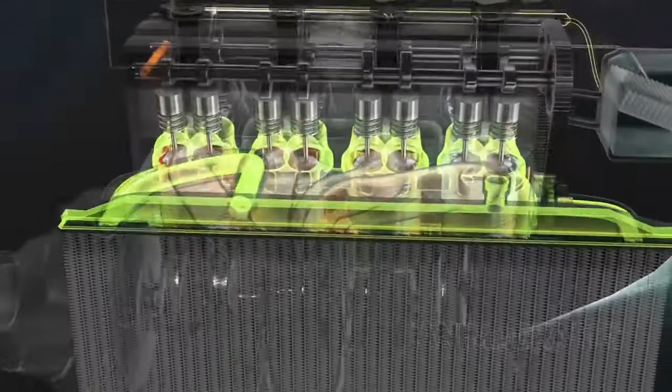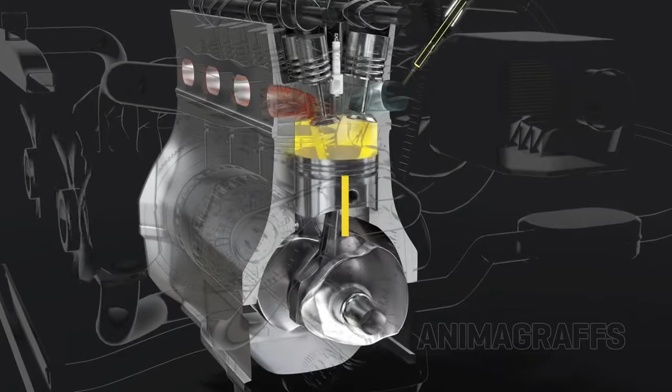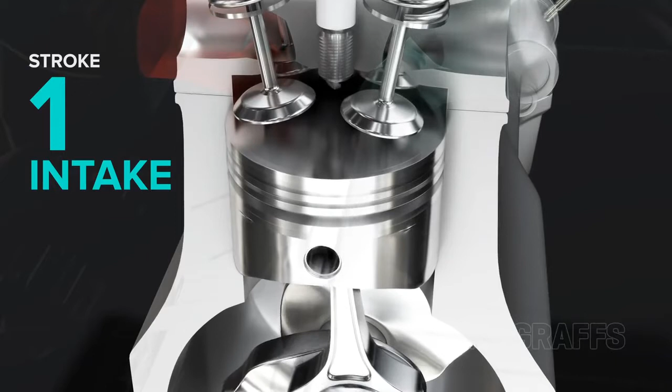The four-stroke cycle. When a piston travels to the end of its range, whether up or down, that's a stroke. Car engines use a four-stroke cycle, and it goes like this. First, intake. The piston descends, sucking an air-fuel mixture into the cylinder through the intake port, with both intake valves

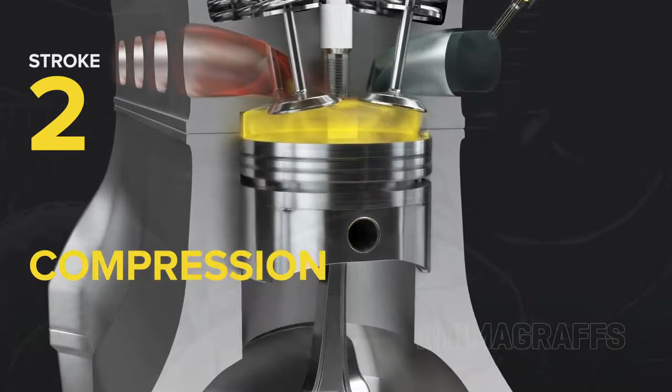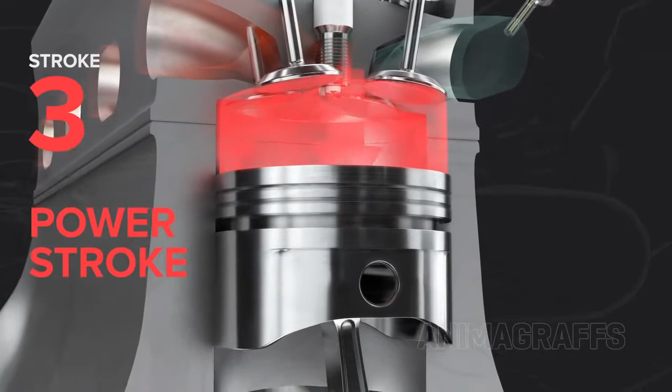open. Next, compression. With all valves closed, the piston comes back up, compressing the fuel and air mixture for more powerful combustion. Then, the power stroke. An electrical spark ignites the compressed fuel and air mixture, and the resulting combustion forces the piston to the bottom of the cylinder again. A connecting rod transfers this power to the crankshaft.

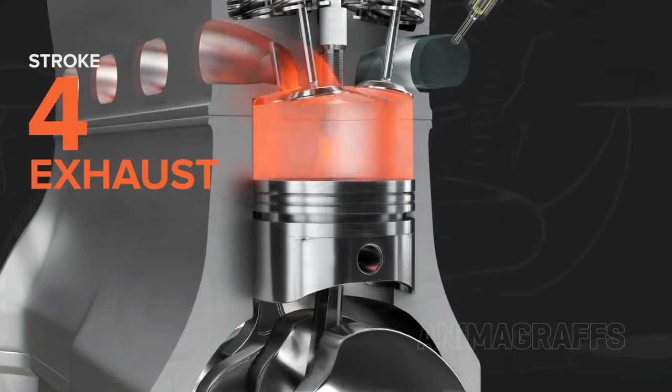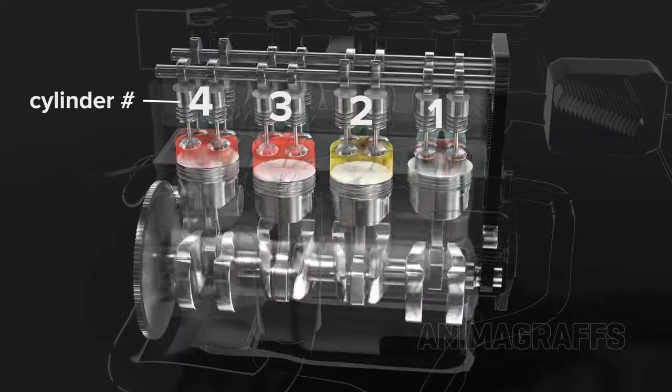Finally, exhaust. The piston comes back up, pushing the spent mixture out through open exhaust valves and the exhaust port. Connecting multiple pistons: for smooth power delivery, pistons take turns firing. The firing order for this engine is 1, 3, 4, 2.

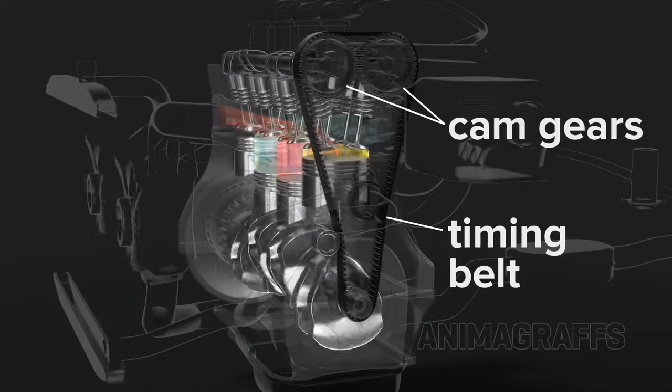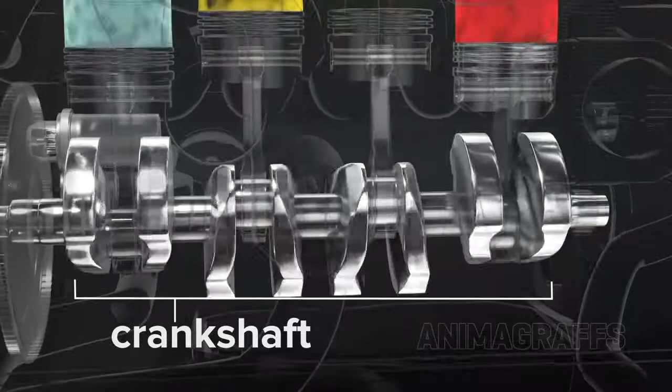Camshafts with specially shaped cams push spring-loaded valves open in turn. Cam gears and a timing belt or chain link everything to the crankshaft, and it all spins together. The crankshaft translates piston power out of the engine. It has counterweights to balance against the pistons for perfectly smooth revolutions.

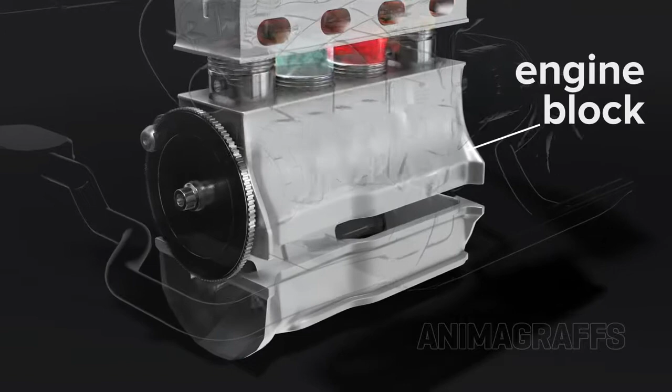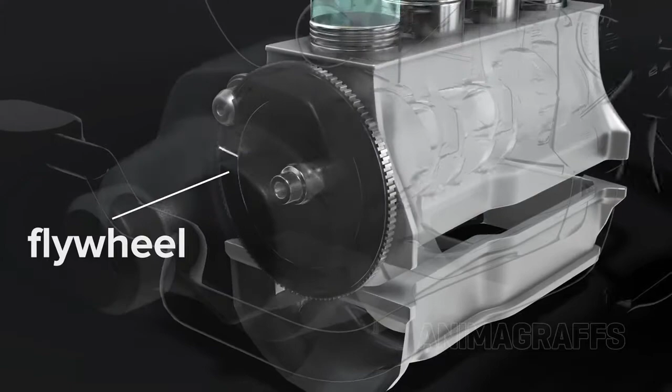This is what RPM means. We're counting the number of full crankshaft revolutions per minute. The engine block holds the crankshaft and cylinders, and the cylinder head holds valves, ports, cams, etc. A geared flywheel sits at one side of the crankshaft for connection to a transmission. It's also where the starter connects to the system.

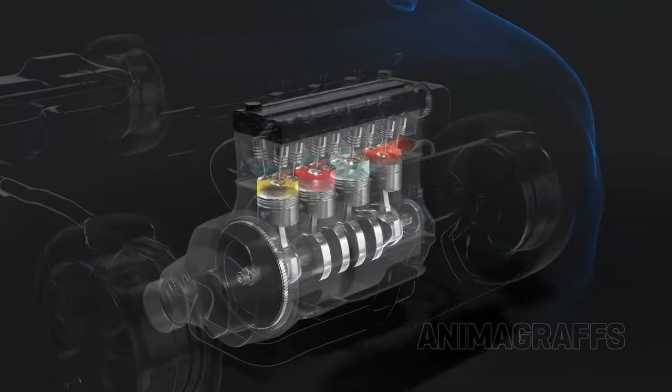This engine has 4 cylinders arranged in a single row, but there are many other possible configurations, like 6 cylinders with 3 on each side, angled in a V shape, or 8. Despite different design goals, the basic engine parts are all there. Now let's look at other systems that support this combustion process.

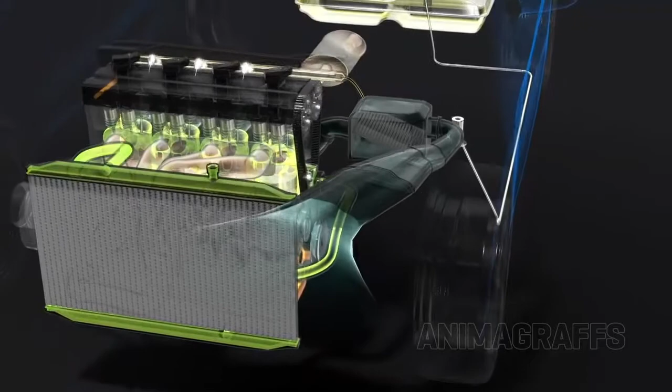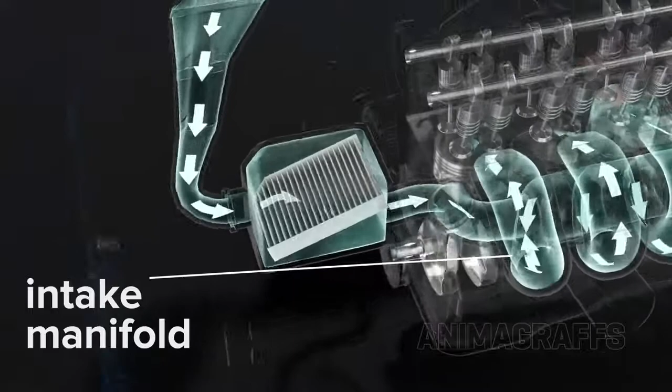Air intake. Air comes in through the air filter and then into the intake manifold, where it mixes with fuel before being sucked into individual cylinders through intake ports.

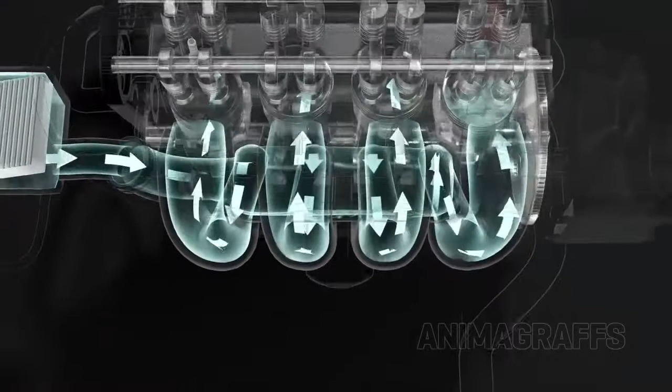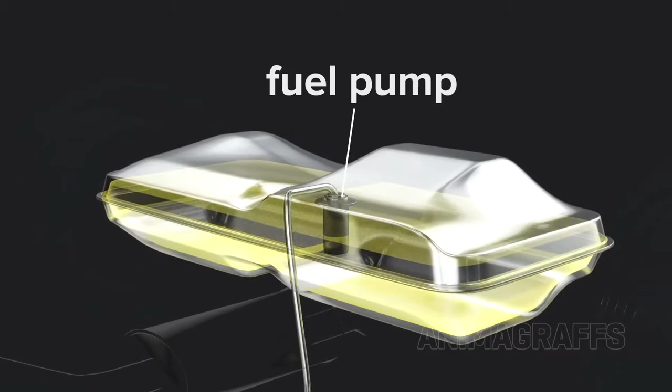Fuel. The fuel pump carries gas from the tank through a fuel filter to the engine, where fuel injectors emit a precisely timed spray of gas into the intake port.

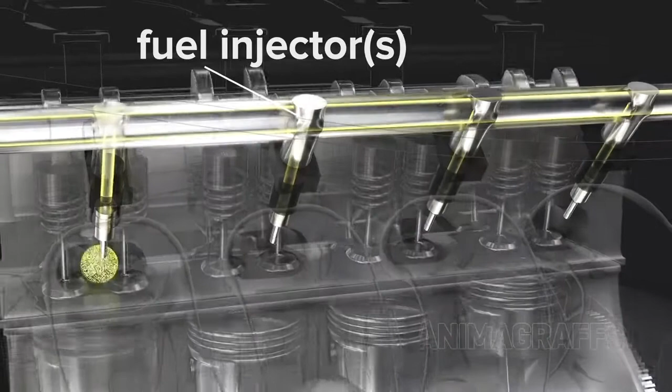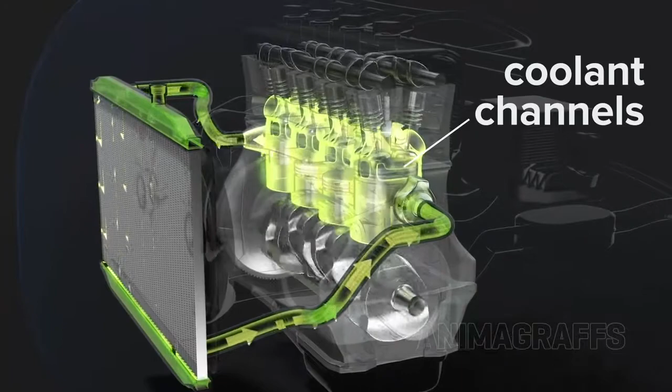Cooling. Engines get very hot during operation and require a cooling system. Coolant channels around the cylinders and through the cylinder heads carry a special liquid called antifreeze to keep temperatures within safe operating range. It's called antifreeze because it won't freeze in icy weather.

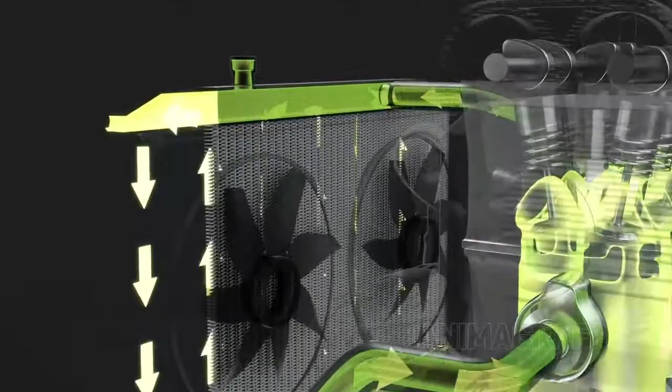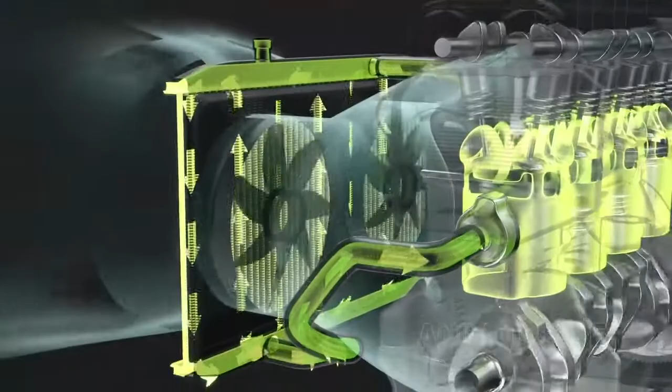After cooling hot engine parts, coolant circulates through the radiator. The radiator has a network of small tubes and fins. Coolant passes through these channels while air, pulled in by the radiator fan, blows by the tubes, cooling the hot liquid for recirculation.

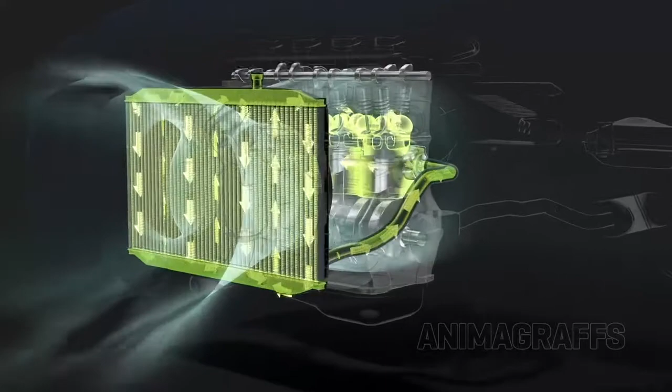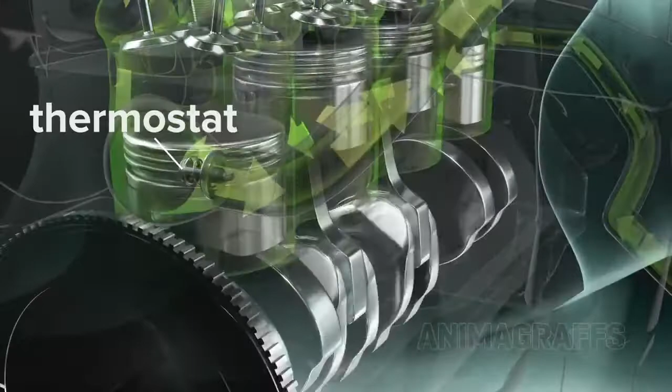A water pump keeps the coolant system flowing and properly pressurized. The thermostat regulates coolant temperature by either routing coolant back through the engine or to the radiator for further cooling.

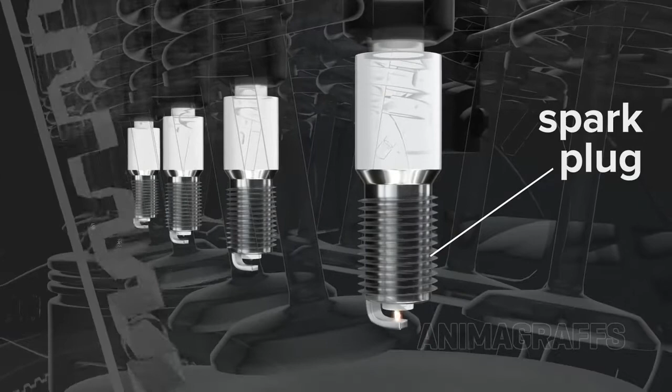Electrical. The spark plug delivers the electrical spark that ignites the fuel-air mixture for combustion. The metal core is insulated from the outer metal casing with porcelain. The spark jumps between these conductive surfaces.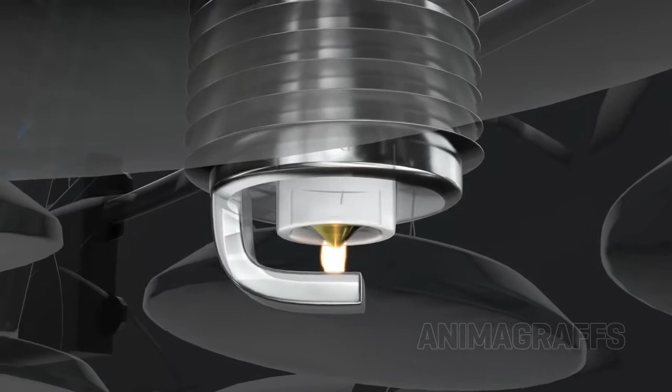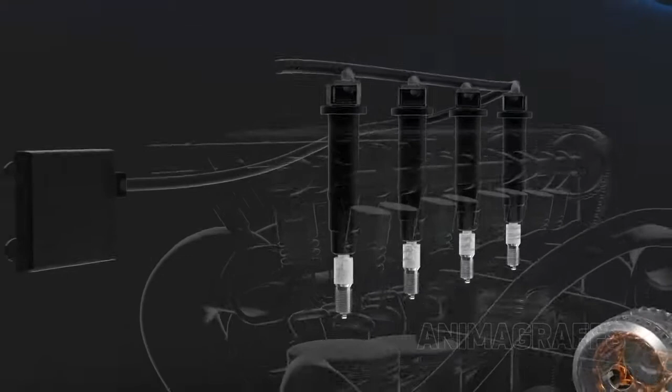The coil pack delivers electrical current to the spark plugs as directed by the ECM, or Engine Control Module. The ECM is a computer that directs many core engine functions like spark timing, valve open and close timing, air-to-fuel ratio, etc.

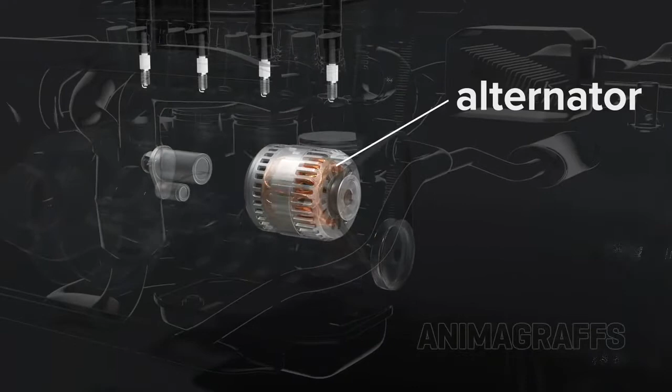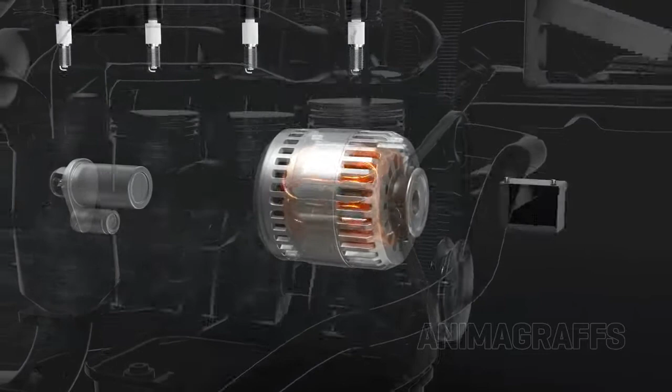The alternator works like a power generator, converting the engine's mechanical energy into electricity to charge the battery or run other electrical systems while the engine is running. The battery provides power to the starter for engine start.

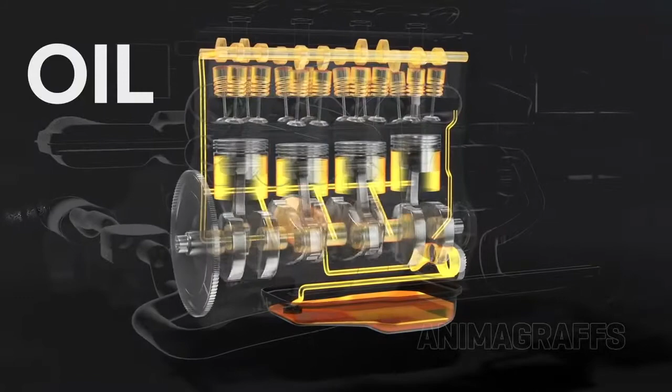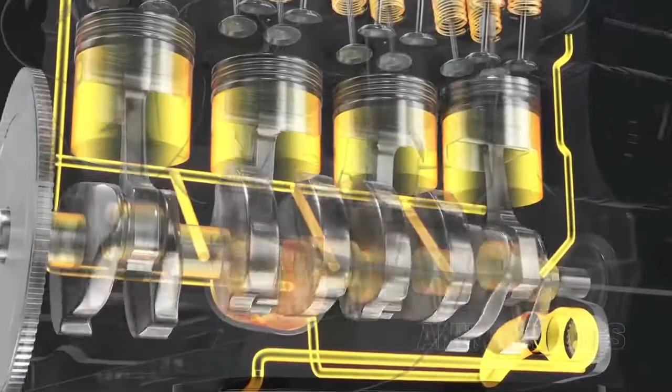Oil. Motor oil is used to lubricate, clean, prevent corrosion, improve sealing, and cool the engine by carrying heat away from moving parts. Rings around the top of the piston head keep oil out of the combustion process, while otherwise allowing the cylinder to be lubricated. Oil galleries are channels through the engine block and cylinder head that carry oil to various engine parts.

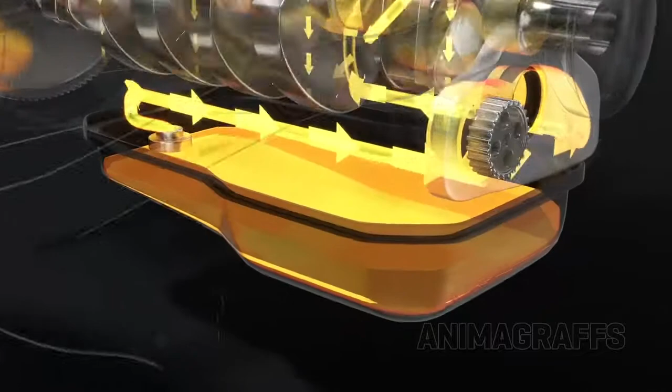Oil flows through the engine and back to the oil pan for recirculation. Oil rests in the oil pan when not in circulation. The oil pump keeps oil properly pressurized and flowing. And the oil filter keeps oil clean from contaminants.

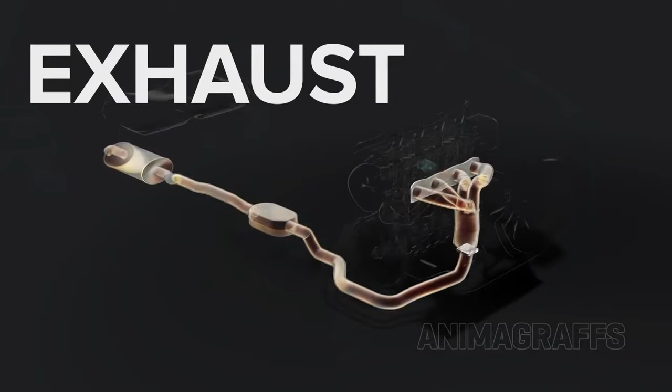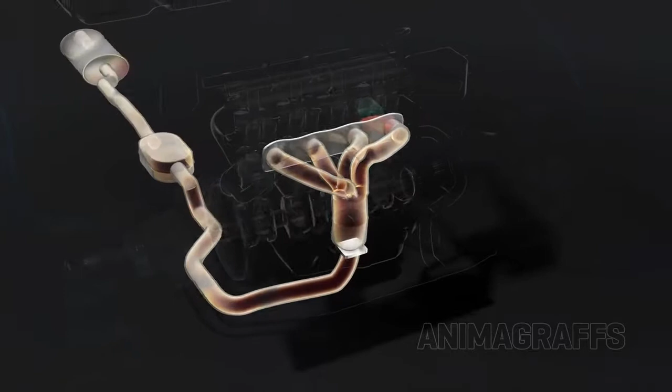Exhaust. The exhaust manifold collects gases from multiple cylinders into one pipe. Exhaust flows through the catalytic converter, which captures toxic chemicals in engine exhaust, and then out through a muffler that reduces exhaust noise.